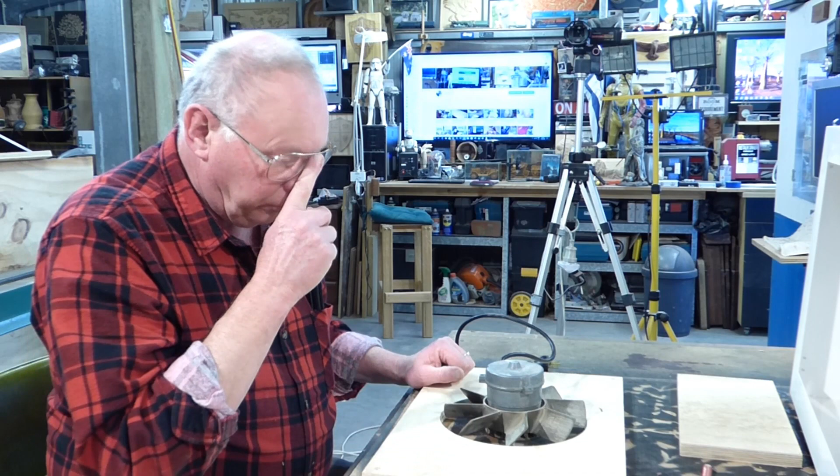So I'm going to take out a 1/4 of an inch or so of this over that sort of area to be able to utilize the whole of the air filter. So I'm going to go and cut, repeat this cut like I did on the last video, and I want to make another boss to go on here to raise this up, to thicken this up, to enclose all of this. So I'll make that my next two jobs and connect it up and see where we go from there.

And I've got to design some sort of small structure to clamp the motor and support it, across the wood there, and probably clamp it here, just with plyboard. It's fine. So okay, that's the next jobs.

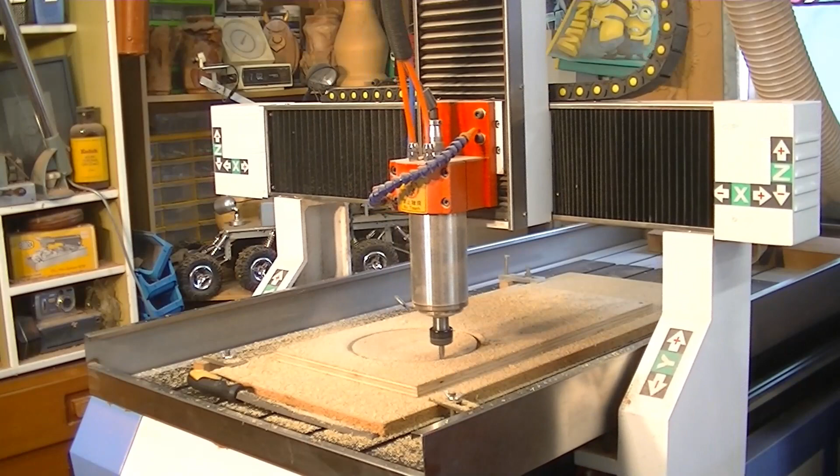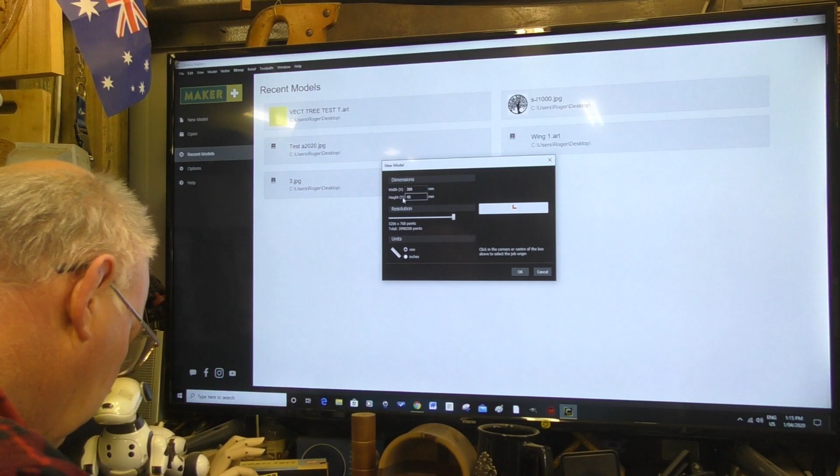Okay, so here we are in Carveco Maker Plus. You can do this also in Carveco Maker. So we're going to start a new project, and the measurements are 305. Ooh, that's a big number. So make that 305 and 450. Okay, high resolution, working in millimeters, press, now then.

I've drawn this as the actual size of our material. And because I've machined the center out, I'm going to have to now place the datum point, or the start of the program, in a different area. Okay? Normally with the CNC router, it's in this bottom left-hand corner. So that's what we're going to do, because the piece of material has the center missing now. So I'm going to press OK.

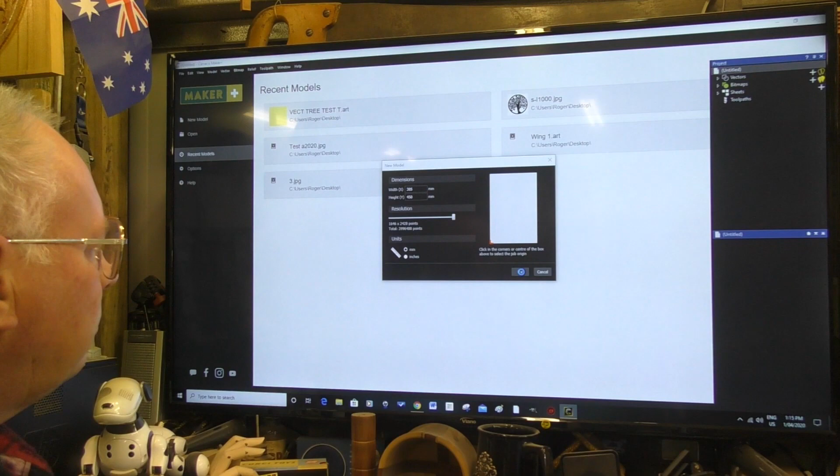And I'm going to show you a couple of little things here, very simple things. Let me see, so we're going to draw a square over our entire area. Now you notice the target has changed, the cursor has changed to a target there. That's telling me, Carveco's telling me, oh, I found the corner. So I don't have to be very, very precise and go right onto the corner. Carveco has already snapped to it.

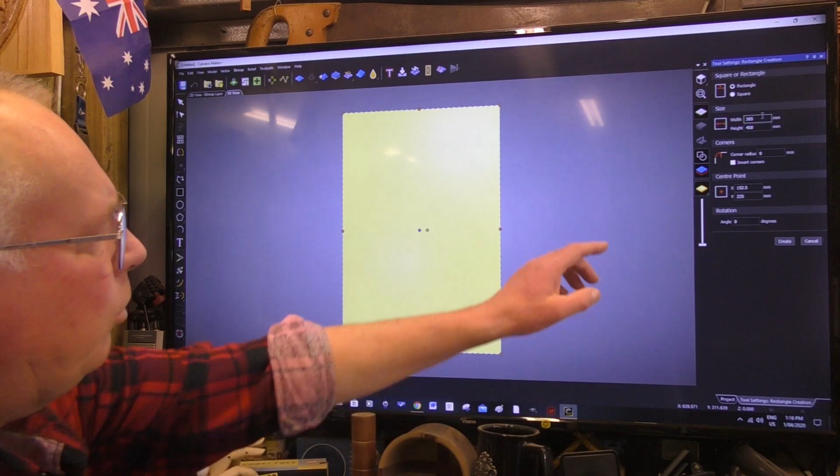So draw our squares, and it's snapped to the bottom corner there as well. So release, and it's done it. And there's the measurements up there. I can alter the measurements if I require. And we're going to say create.

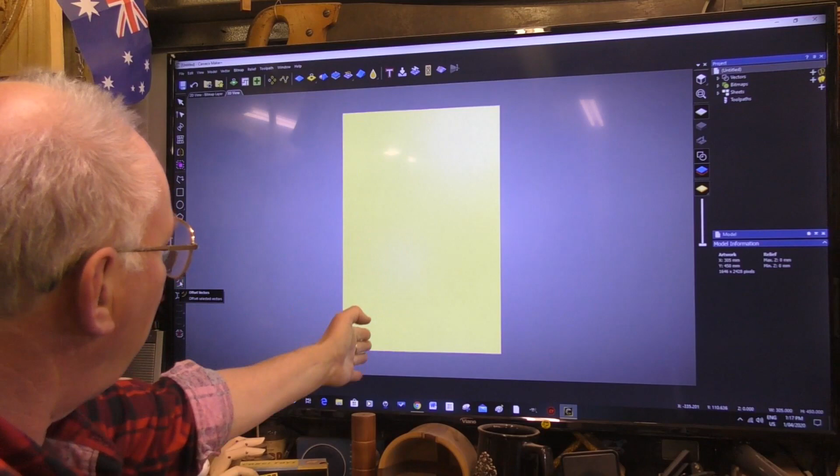So we still have that selected. So I'll cancel that now. Okay. So what I'm going to do is I'm going to say offset the vector. Now, whatever you draw on here, a line, a circle, a squiggle, it's called a vector. So that's what a vector is. It's a mark on the screen, mark on your paper there. So we're going to offset this vector inwards.

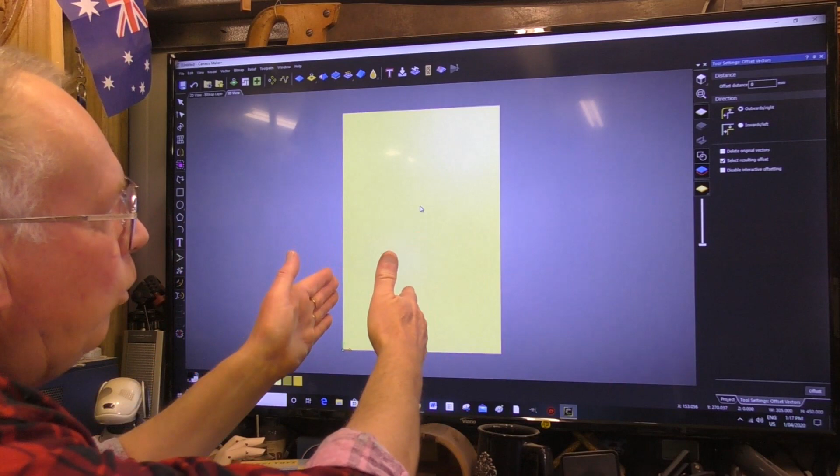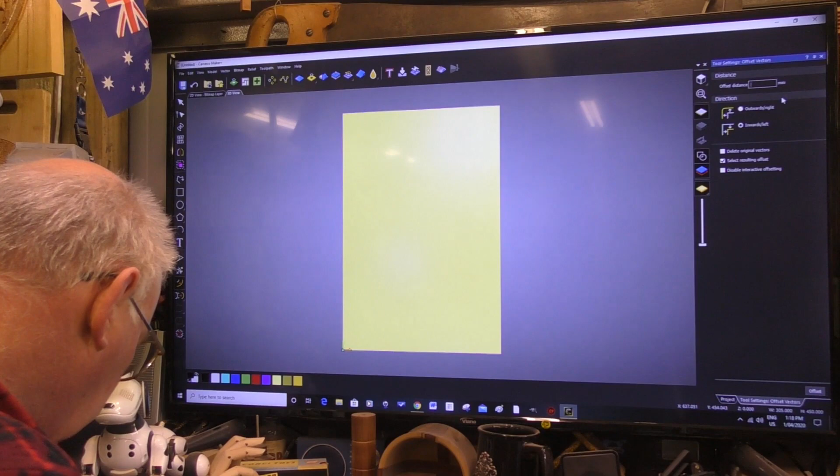And we're going to offset it inwards, like that, and give it a distance to offset it. I'm going to say 19 millimeters, about 3/4 of an inch. Actually, I need to make it a little more than that - we'll make it 25, because I'm going to have a couple of screws, and there's already screw holes there. 25.4 millimeters is 1 inch.

Okay, so I'm going to say down here now, offset. There it is, it's done. So now let's get rid of this first - crossing it a bit - so I'm going to select the outer one and delete it by pressing delete on my keyboard. I'm just showing you some simple things here with using the CAD part of Carveco, things you'd do probably when you first get your CNC machine. Just simple pockets, this is going to be a pocket.

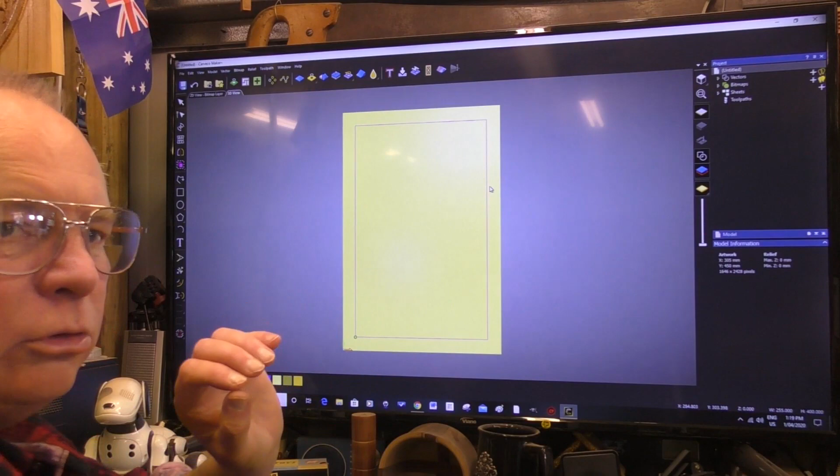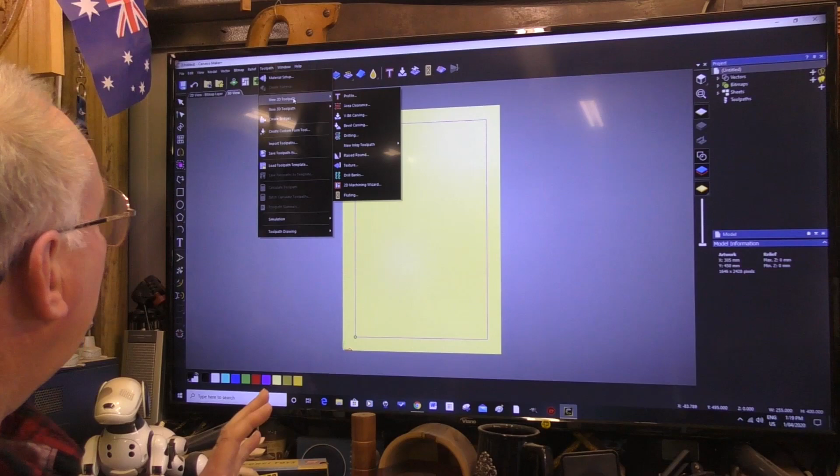Okay, so we highlight that now, and we say, okay, we want to machine this. There's two areas you can go to get into the tooling part of it, either up here in this corner where it says toolpaths, or from here where it's a 2D toolpath. This is an area clearance, so that's what we're going to choose, area clearance. And you have this dialogue or wizard pop up that you just fill in, it's very easy to do.

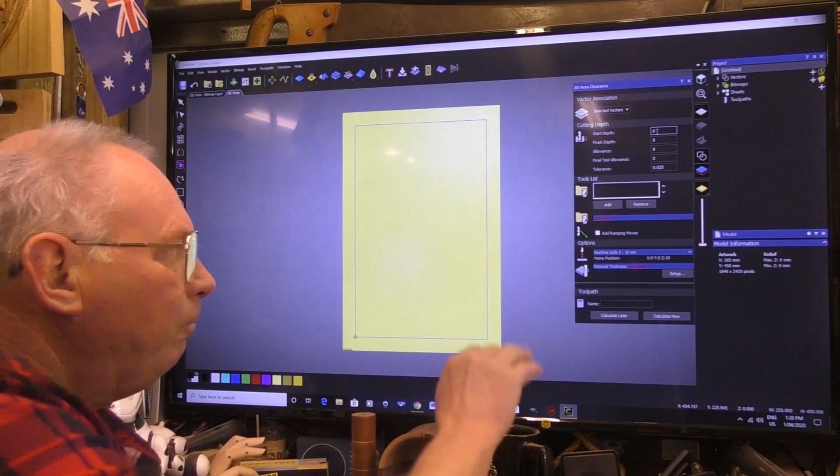Start depth 0, so the 0 is going to be the top of our material. Finish depth, I'm going to say 5mm, which is about 6mm - that's closer to 1/4 of an inch actually. 6mm. We're not worrying about allowance because this is just a bit of wood.

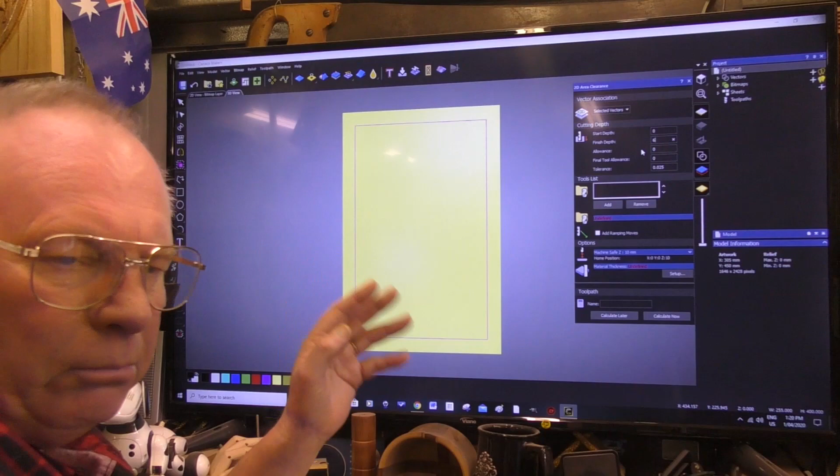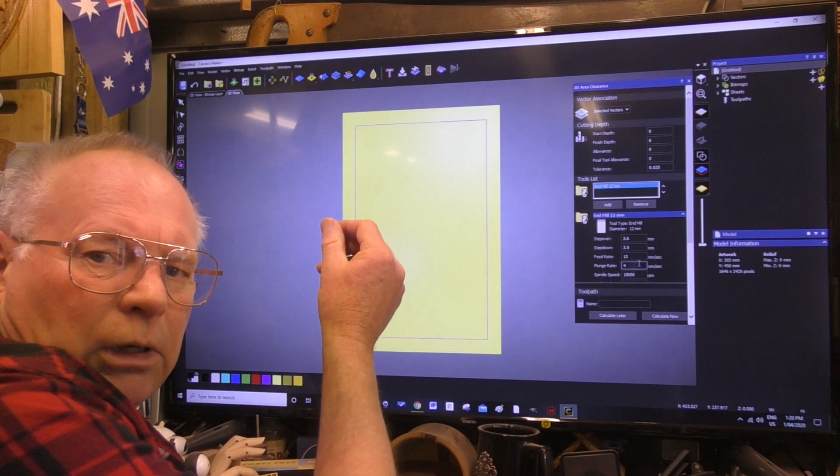Now we're going to add a tool, and we're going to say 12mm end mill, and we're going to select that. So now we can go into here and choose the individual settings for this piece of work.

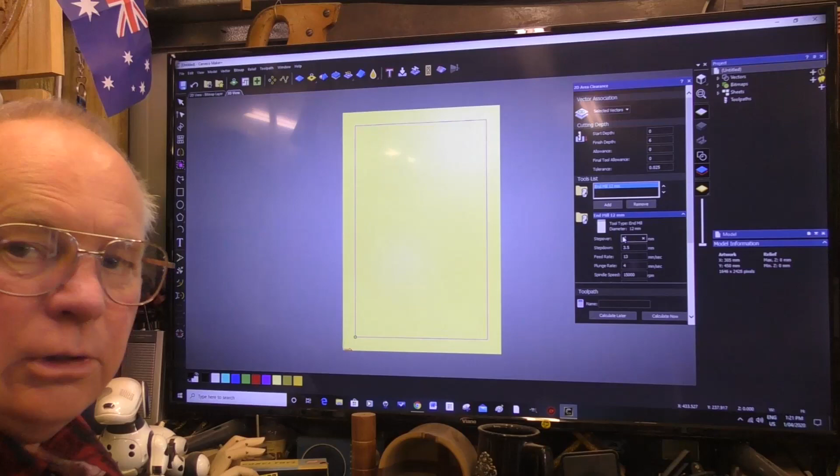Step over 3.6. Well, actually I can take that to 4. Probably take a little bit more than that actually, probably go 5. Like I say, it's only wood, it's not aluminium or anything like that.

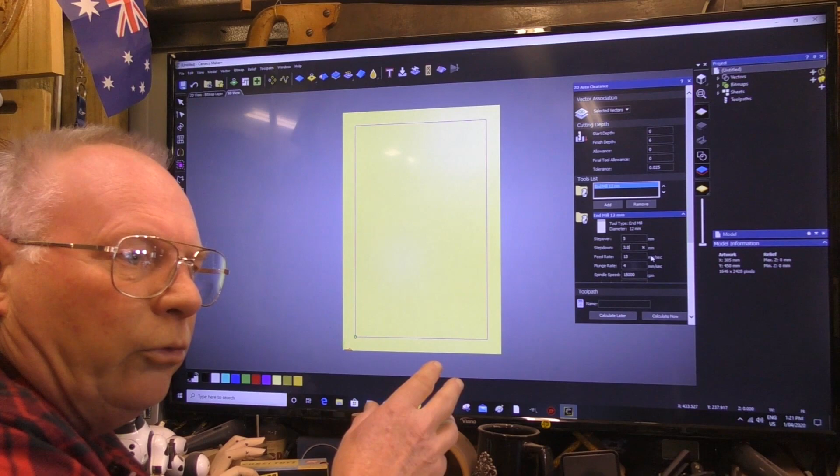Step down 3.5, so I'm just going to say 6.0, so it's going to do it in 2 layers. I'm doing it in 2 layers because, well, you know, I'm going to do it in 1. It's not a carving, I'm not worrying about splintering or anything like that too much, so it'll still be a tidy job. So we're going to say we'll do it in 1 cut, we'll do it 6mm.

Feed rate. Feed rate can be 50mm a second, that's 2 inches a second. Okay, it's going to be getting along pretty quick.

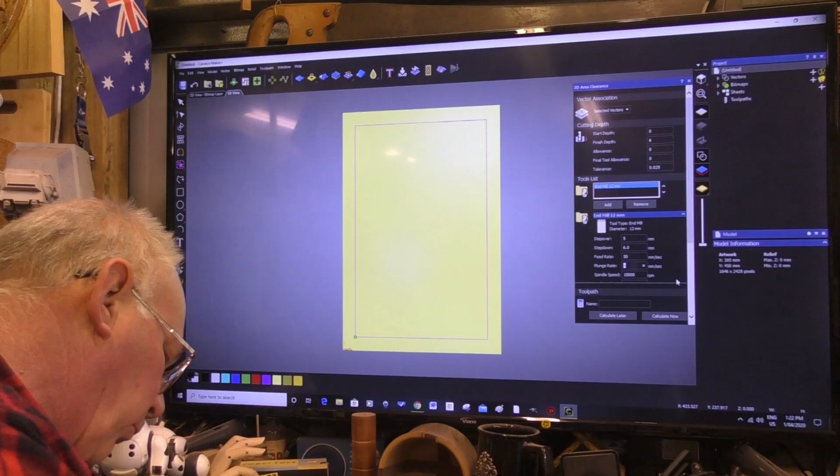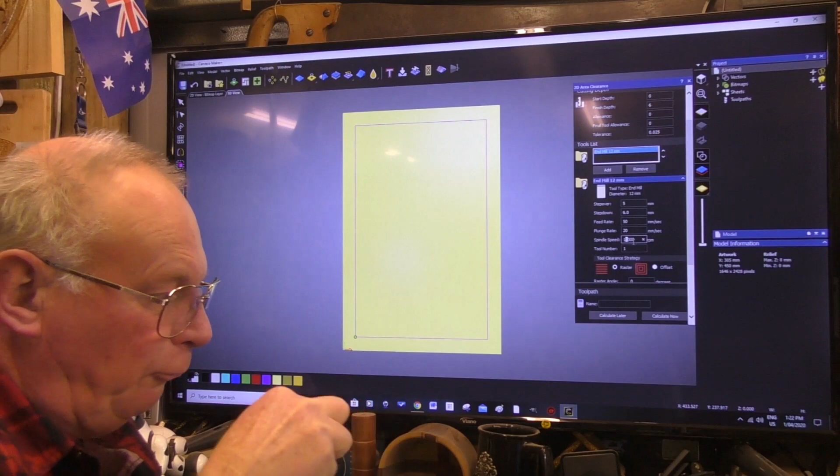Plunge rate, 20mm. 15,000, I like to run that. Now, if you raise the feed rate, you must raise the RPM, because otherwise the tool and the spindle is going to bog down. If you try and force the tool into the material real quickly, it's going to stall the spindle if you're not careful.

So it's necessary to speed the RPM up to cope with the extra speed of travel, so we're going to say 18,000 RPM. The tool number doesn't matter, I don't have a tool changer. I'm going to do an offset, and we're going to do climb milling, and we're going to start on the inside working out - that's fine.

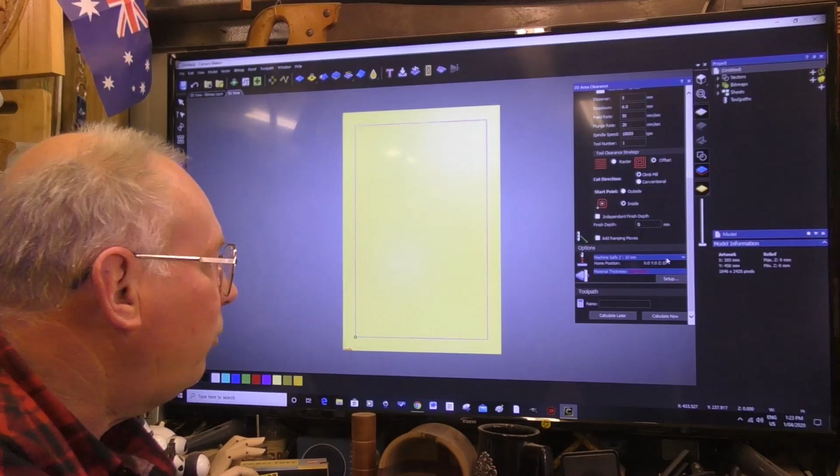No need for a ramp in or anything like that, because there's nothing there in the middle, so it really doesn't matter to us. It's going to quickly sort of run around in the air and then start cutting the material.

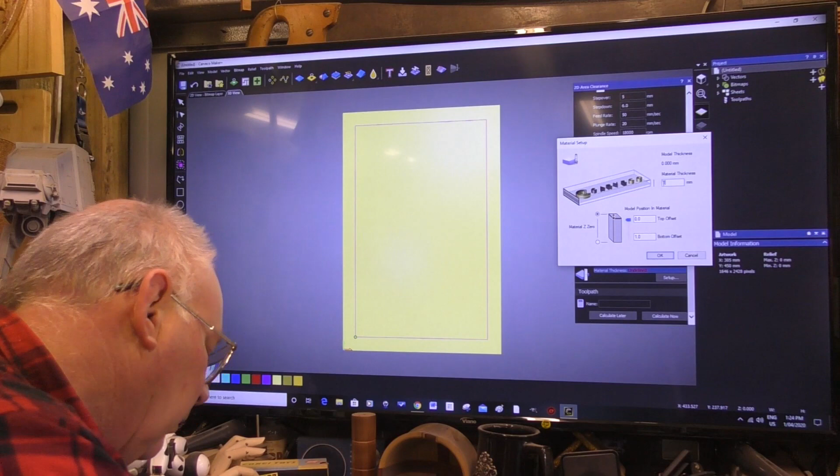Okay, let's set up the material thickness now, and I know that's 18mm. 18mm. Zero's at the top. Okay.

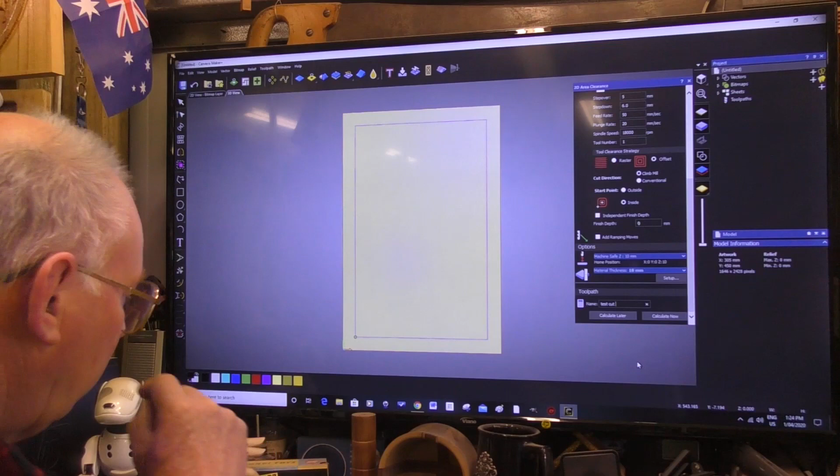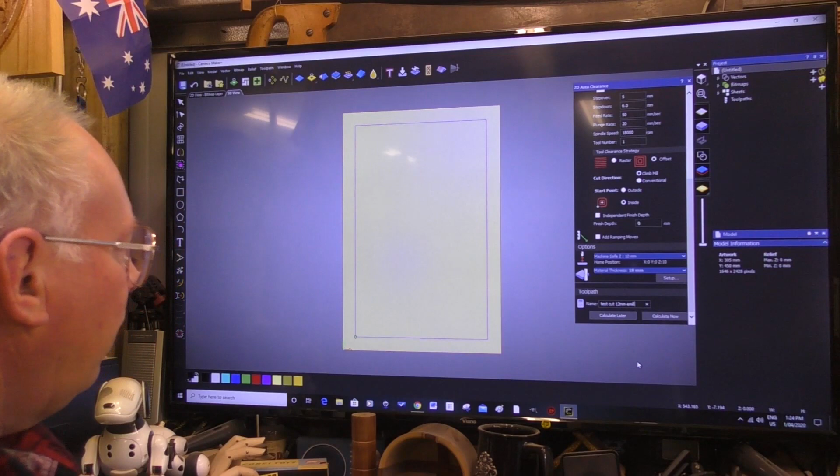Okay, so this is a test cut. We're going to say this is 12mm end mill. So I just abbreviate everything, so long as you can understand what it is, it's fine. So we're going to calculate that. Boom, done.

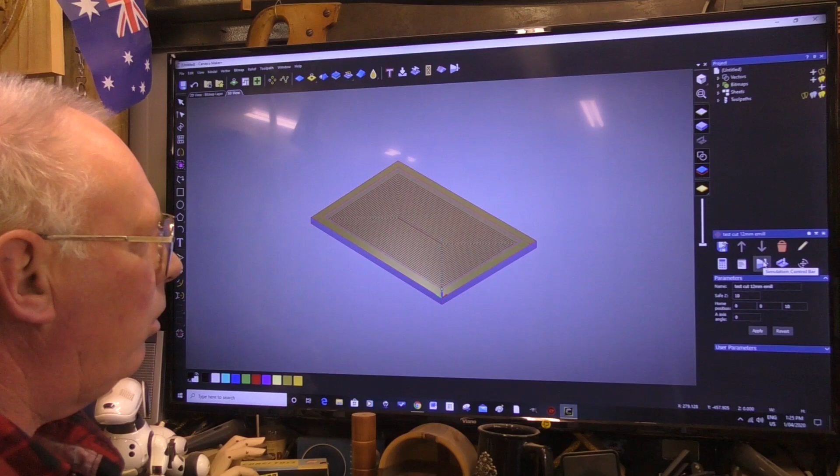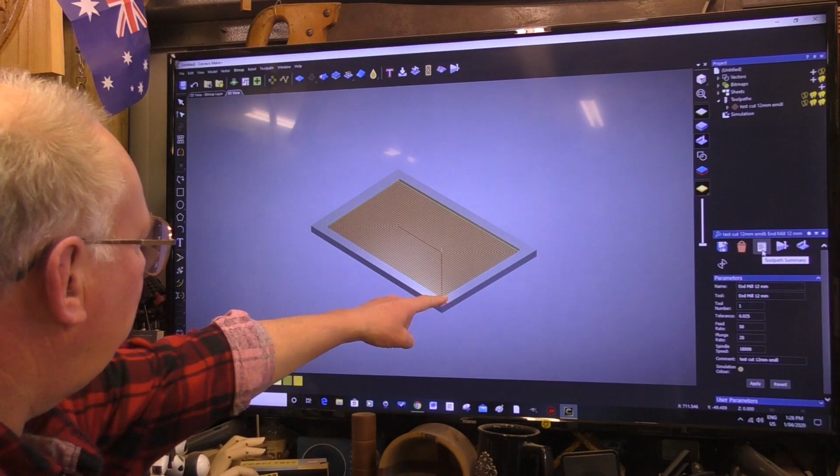If we wanted to, we can simulate that. So what we're going to do is alter the view to an isometric view, and then we're going to press simulate, standard settings, simulate. Boom, done, there it is. And we can actually turn on the material and turn on the tool paths, so you can see the tool paths, that's what's going to happen.

So now I'll transfer this into Mach3 and we'll get set up and cut this. Okay, here we are in Mach3. I'm just going to show you a couple of little things here. First of all, this is left over from the last job that I did, so what I'm going to do is close this G-code file.

So it's deleted now out of Mach3, and I'm going to come up here and load G-code. There it is. And it's in there, but Mach3 still doesn't know where it is at the moment. So what I'm going to do is come here to the machine home.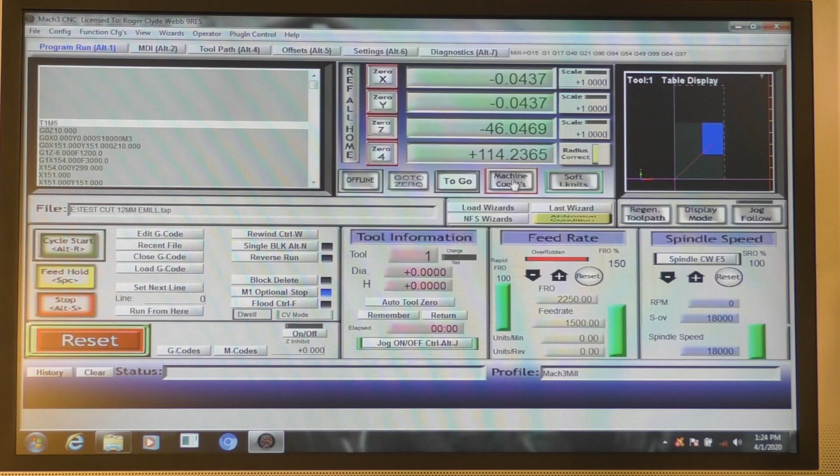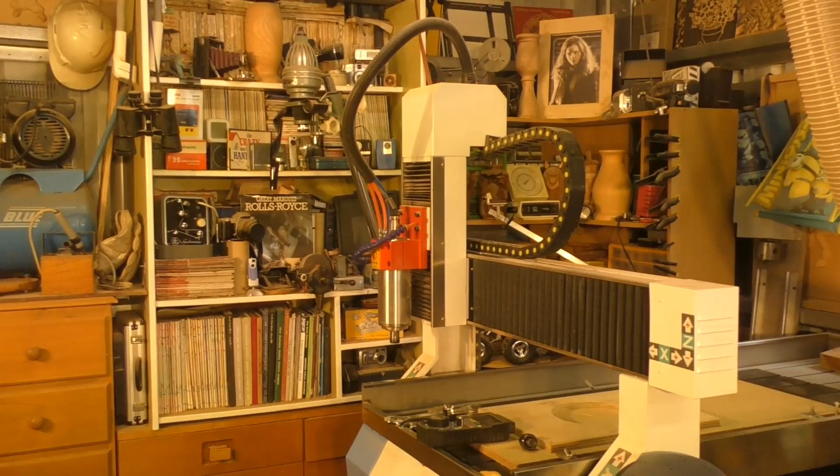I'll show you where the machine home is now. So this is the machine home position - as far forward as the gantry can come, as far over to the left hand side as the router head can go, and up as far, nearly as far as it can go. This is the most convenient area to change a tool. Very convenient here. So this is the machine home.

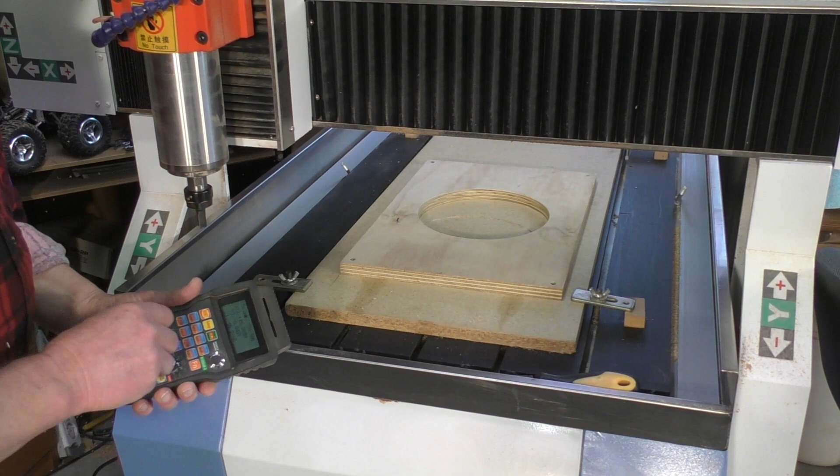Now we're going to make the start of the program in a minute and find the 0,0 start of the program, which would be in the bottom left hand corner of our piece of material that we've got on the deck. So we'll do that next, and I'll just put this tool in here. So what I'm trying to do is visualize the center of this tool right into this corner here. By eye is okay, within sort of 0.5 millimeter, that's just fine.

Okay, let's just take the Z down now. Okay, that's done, so it's just touching the material, and the center of the tool, if you can visualize it, is just on the edge of that corner. So now we'll go back to Mach3 and we'll set the zeros.

Okay, so we'll get the cursor now and come here to the X, Y and Z little buttons and go X0. Oh, that's better, so I was still in machine coordinate there. So X0, Y0, Z0, and what is very, very important here is to go to the regen button, push that, and you'll see that the work itself and the tool position will jump into the correct location on this table. This represents my table, so that will jump there.

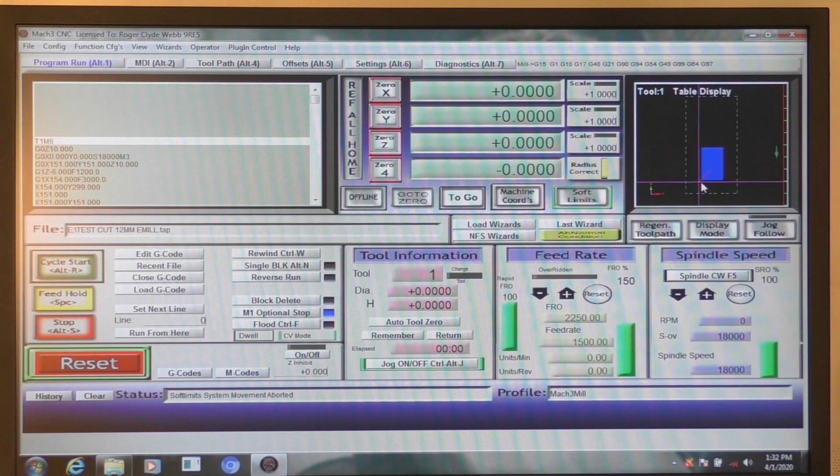So now I'll just raise the tool up off the material and we'll set the cut going.

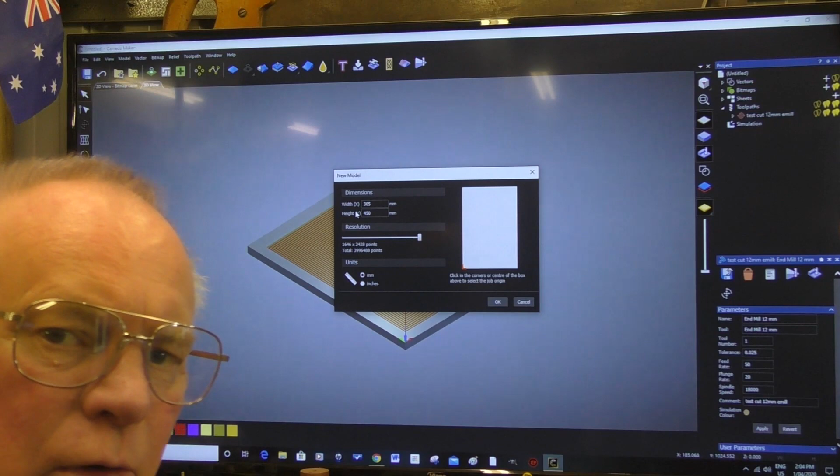Okay, let's do it. So now we're going to start a new job, and to do that you come up here to this top corner to File, press that, New. So our new piece of work is, oh, it's already set there in the X, which is 305 millimeters, just a little over 12 inches, and this one is 458 millimeters.

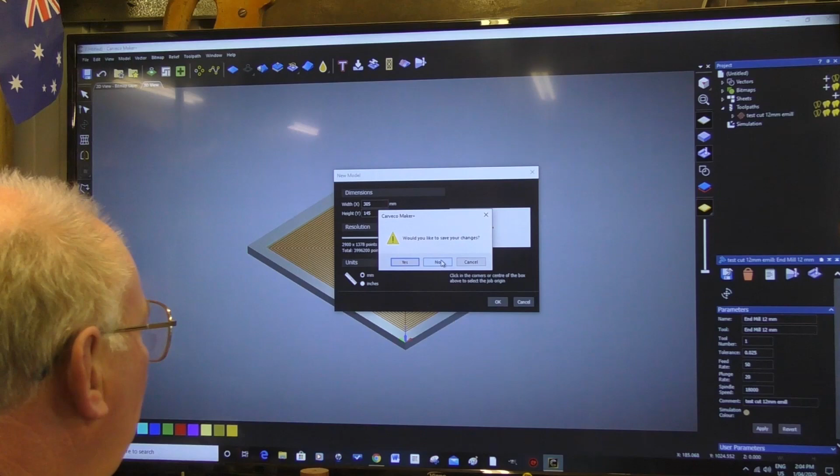And now we want the center, so that's the center origin of our job. I'm going to say... and no, I don't want to save - that was just asking me if I wanted to save the previous project. No, I didn't. Okay, so right in the center here, the armature or the body is 78 millimeters in diameter.

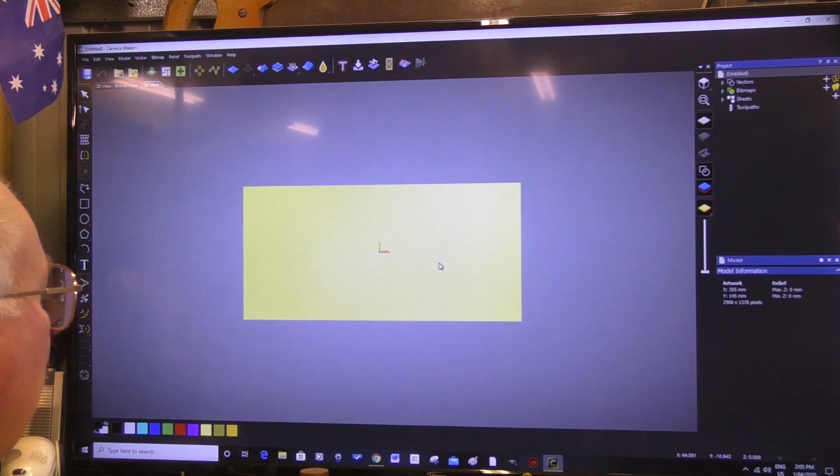So first off, we need to get the circle drawing tool, come to the center, and it'll snap, it'll come out. And we want to say we want this diameter 77, and create.

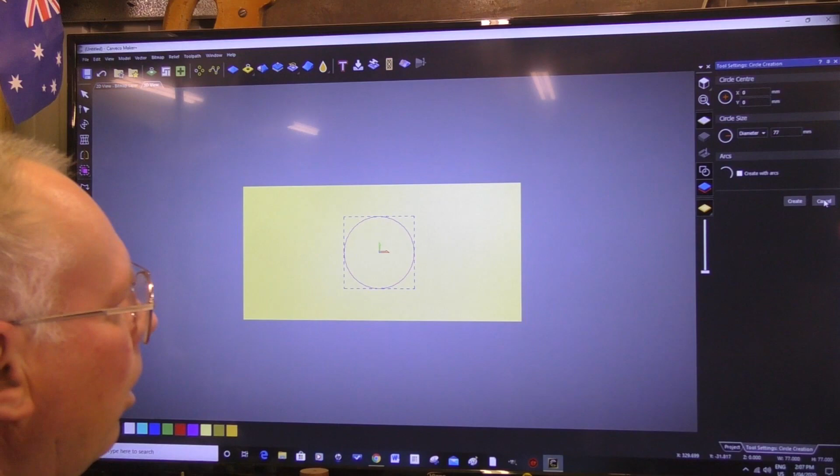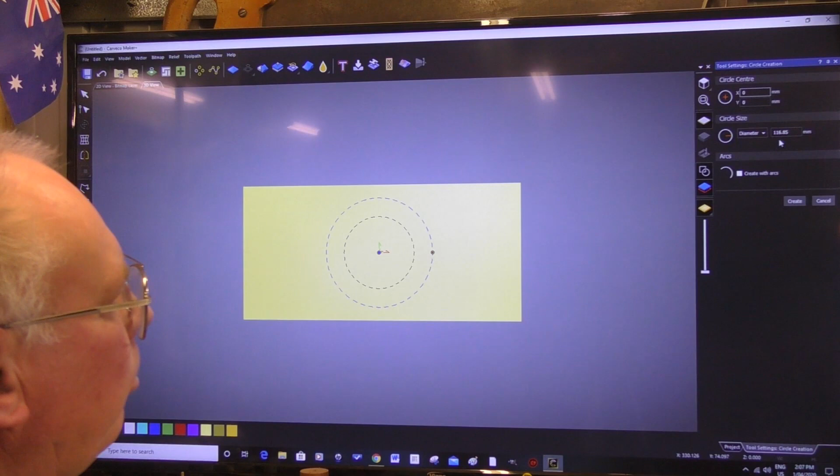So the next thing I want to do is close that, and I want to draw another circle. So come here to the center, and I want that one to be... let me see, 77... I want that one to be 120. And create.

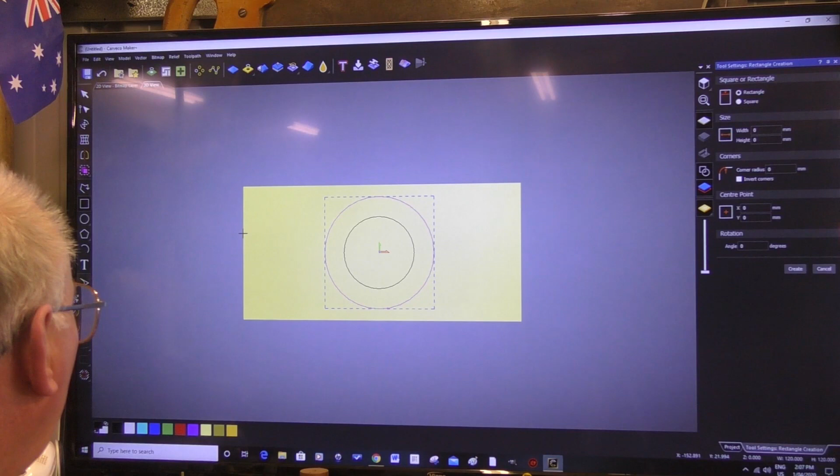And then I want the square, and I want to draw a rectangle over the entire piece of material.

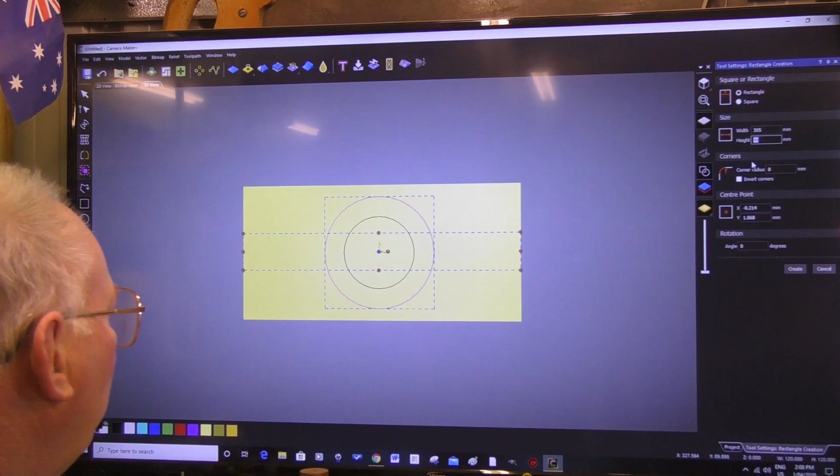So I want that to be 305 long, and I want it to be 40 millimeters wide. Actually, I'm going to make it 45, give it a little bit more meat. 45.

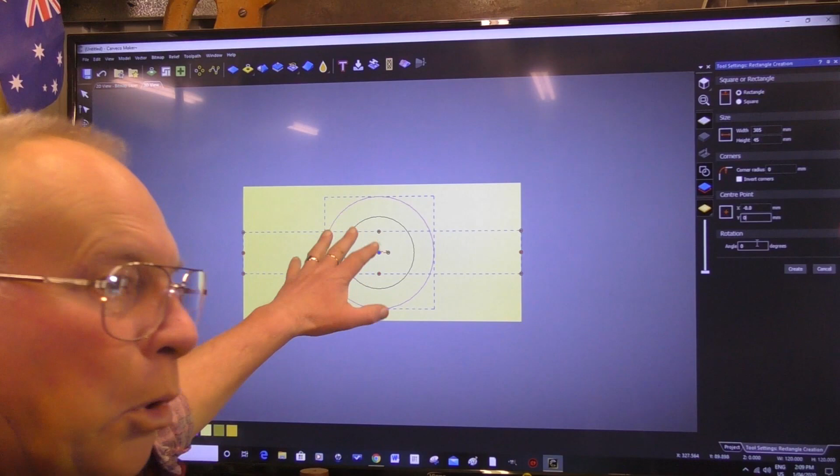Now I want to position this accurately in the middle of this square box. You can just simply press 0 on here and 0 on here, because we know that the center of the job, the work, and the model is x0, y0. So you just do that and create, and it's done. And that's perfectly in the middle.

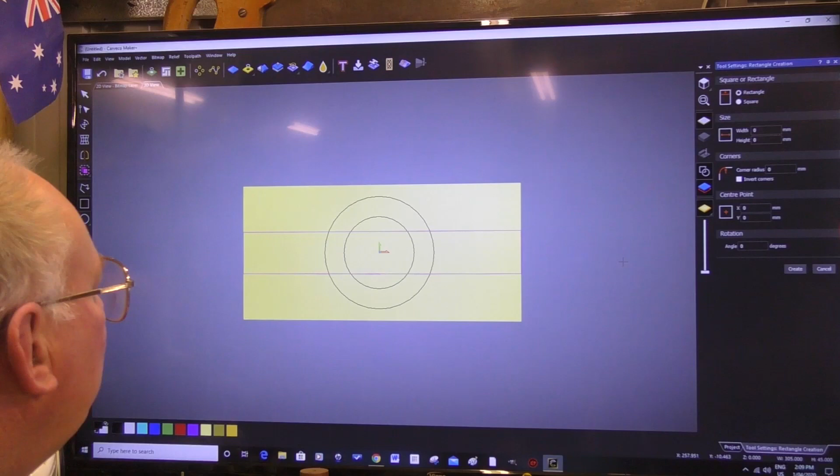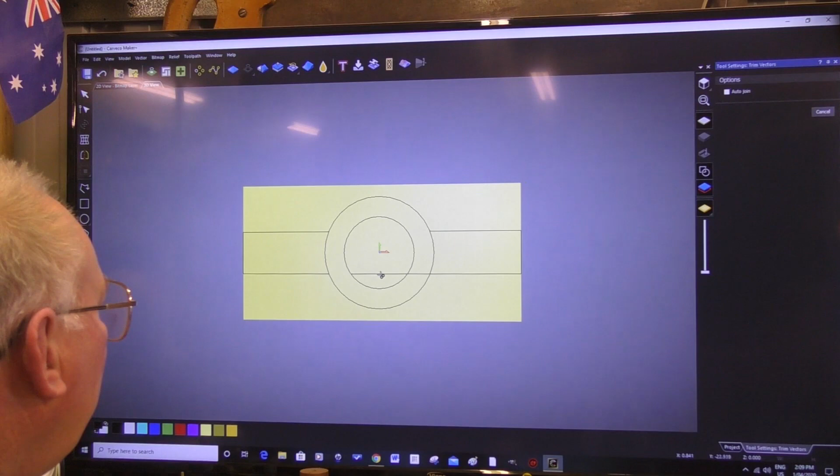So now what we're going to do is get our clipping tool, and I'll show you what we're going to do with that. Over here you'll find a pair of scissors - this is a vector clipping tool. We're going to clip that, and that one, that one, that one, that one, and that one. And there is our shape.

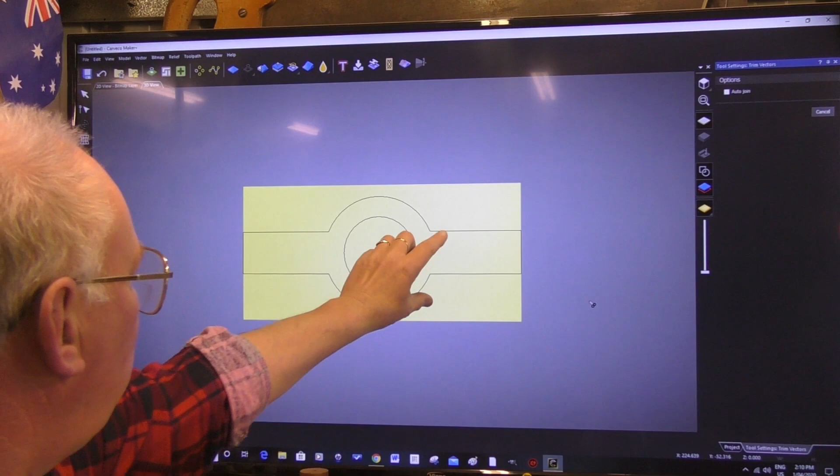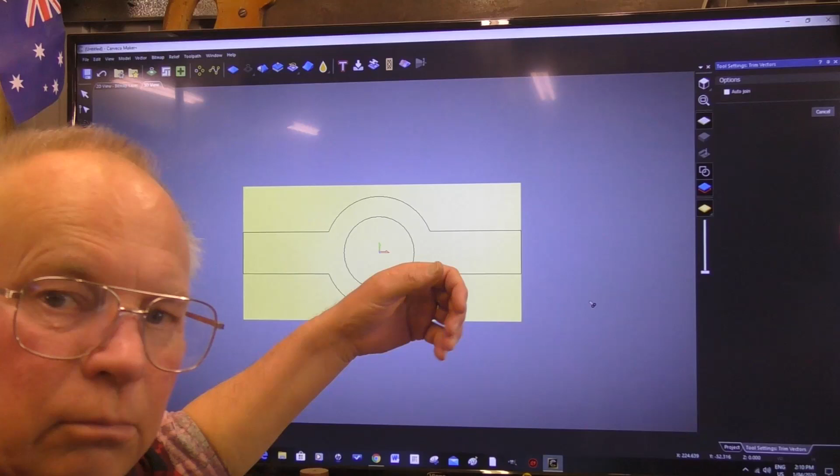Now what I'm going to do is get the CNC router to cut this center out, then run around this outside and cut that shape out. And then I'll just stick this shape on my saw and slit it down the middle, so I have the gap that I require, which is going to be 3mm. And I'll have two halves, and I'm going to put a hole through so I can screw it together and clamp up on the body of that fan motor. Simple as that, it doesn't have to be complicated.

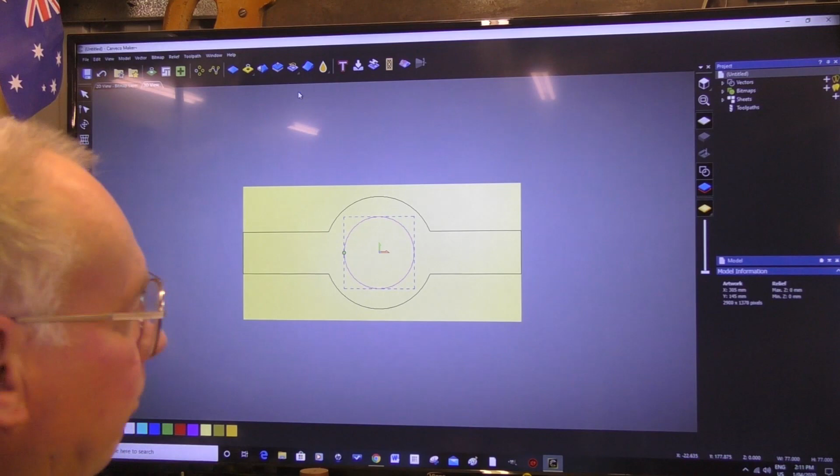So we highlight this, and then we go into toolpaths, 2D profile. I could do an area clearance or a profile - it's just easy for me to do a profile. And so I'm going to change this from the outside of this line, I'm going to say I want it inside of the line, so I want the tool to run around the inside to give me the correct size.

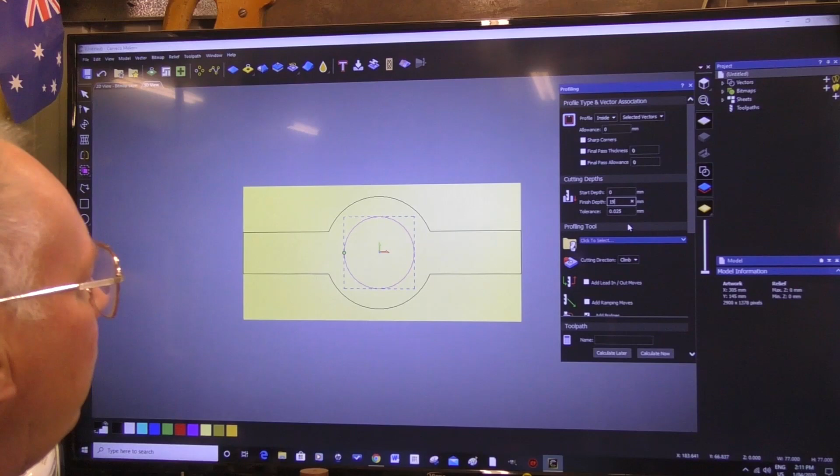None of this really matters to us anyway. Start depth 0 - 0 is going to be on the top of the material. Final depth, because I want to cut right the way through, I'm going to say 19 millimeters. Select a tool, 8mm end mill, select that one.

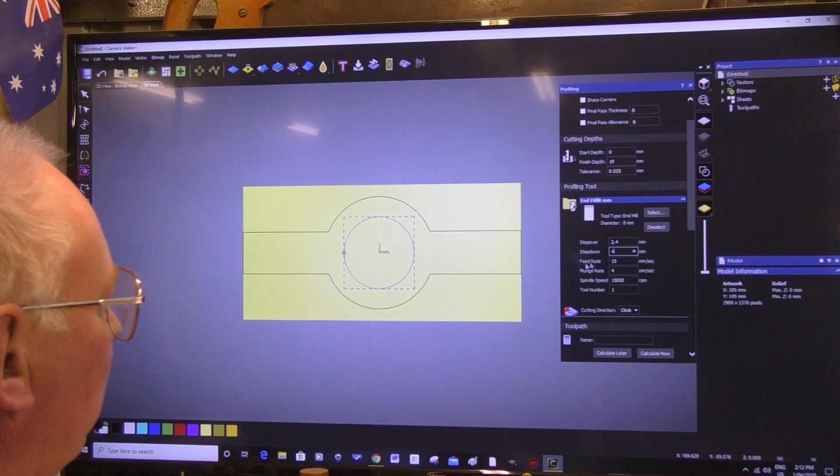Okay, step over - step over doesn't matter to us because we're just going to do a single contour. Step down 2.5 - actually we can go 3, we'll probably go 5 without too much difficulty. We'll go 4, 4mm. Speed - now I'm going to do 50mm per second, 2 inches per second.

Plunge rate, I normally do the plunge rate about 50% of what the feed rate is, so it's 25. I knock this up because I've speeded up the feed rate. Don't forget, you've got to speed up the RPM, otherwise the tool will bog down.

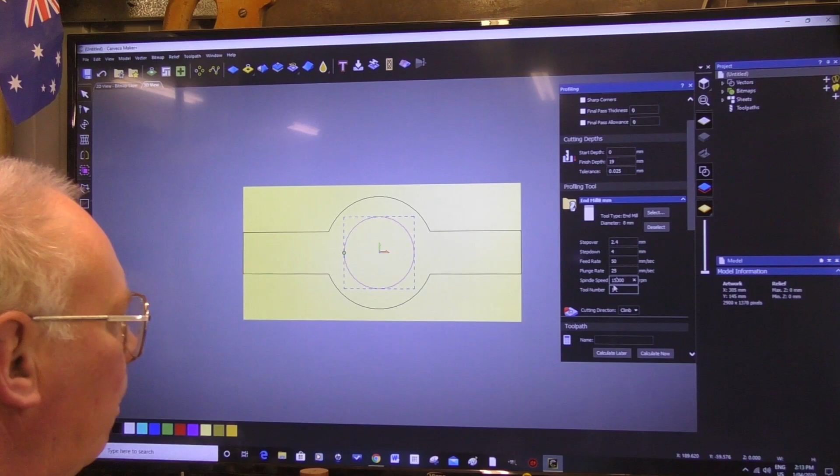That's okay, climb milling, that's right. Now for this time, I'll require ramp moves. Now I normally zigzag, so in other words it'll do this and ramp in - that's exactly what we want to do.

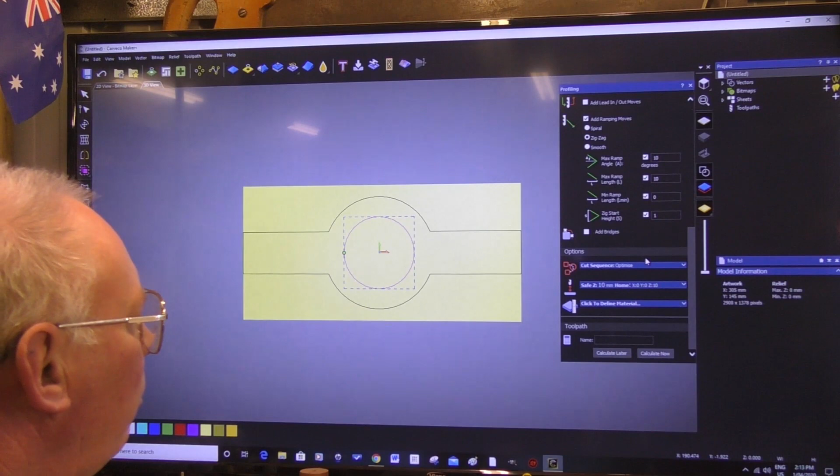No, I don't really require these, not for this job. Safe Z said 10mm. Let's just see what they got with the material.

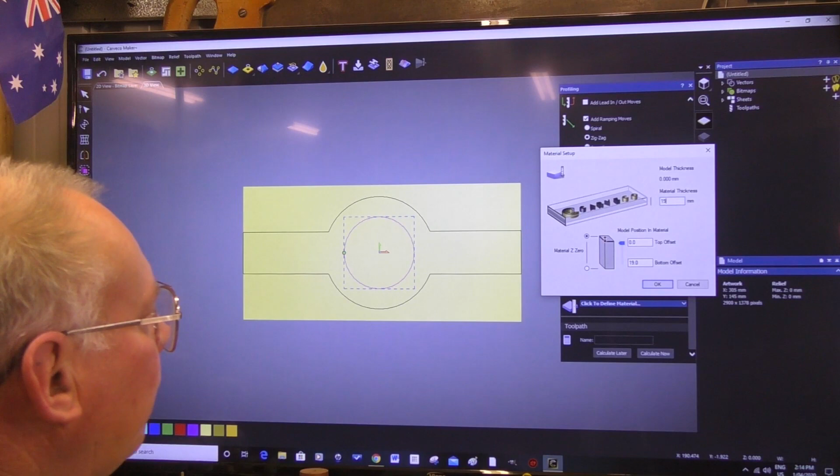We're going to say it's - we're going to call it 19, save any dramas, even though the material is 18mm. We know that we're going to go through to the spoil board.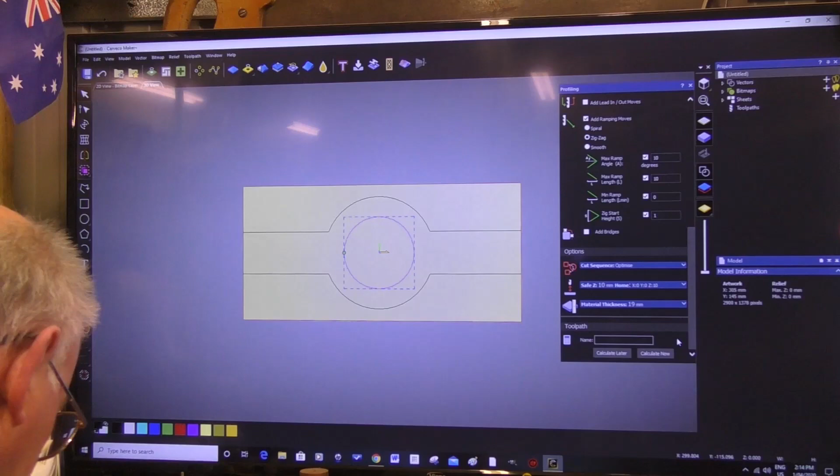Okay, that's that one done. I'll name it, and we're going to say cut 1. Calculate now - boom, done.

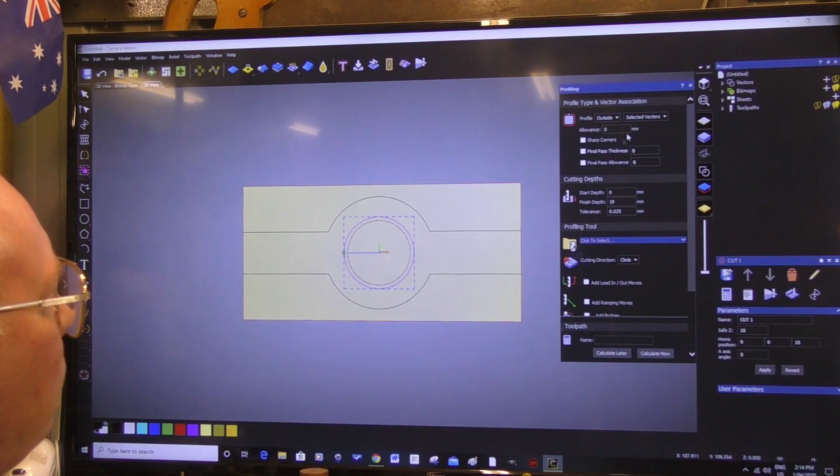Get rid of that. Now, separate job now, another profile, outside, so this time we're going to run - well, we better select that first.

Okay, so there's our tool path. And what I'm going to do is come out of that, and I'm going to go in and edit the first tool path that we did. That's easy, just double click, edit the first tool path, and we'll put - oh, I did already do it. Okay, no problem.

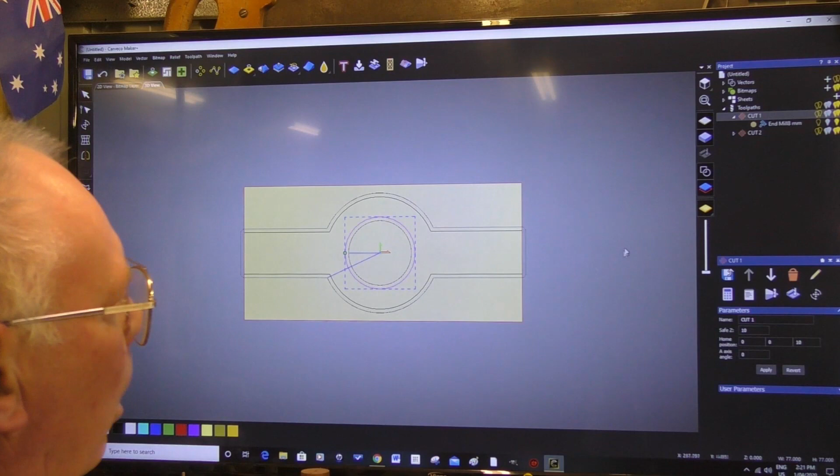Okay, so we'll select an isometric view, and we will run simulation up on all of them, on all tool paths. Oh, there we go. So that's the shape that we're going to end up with. So I'll just transfer that file over to the CNC router now, and we'll cut it.